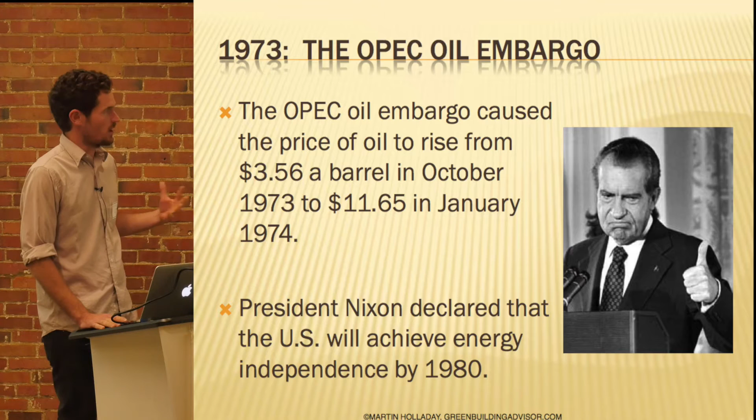So I'd love to give just a brief history of where this has all come from, and there's definitely a lot of people in this room that have been a part of that history and know it a lot better than I do. But yeah, this whole movement that has really culminated in Europe and is now moving towards our country really began here in North America. President Nixon claiming that we'd be energy independent by 1980 was definitely a milestone, and kind of got a lot of interest going in this country and North America in general.

This is basically one of the first Passive House prototypes from 1976. This guy's calling it the Lo-Cal House. But it's got a lot of the same principles that the Germans adopted to the international standard and what we're now using in this country. Good axis, super insulated walls, super insulated assemblies, really good windows, and mechanical ventilation. So all the same principles we'll take a look at.

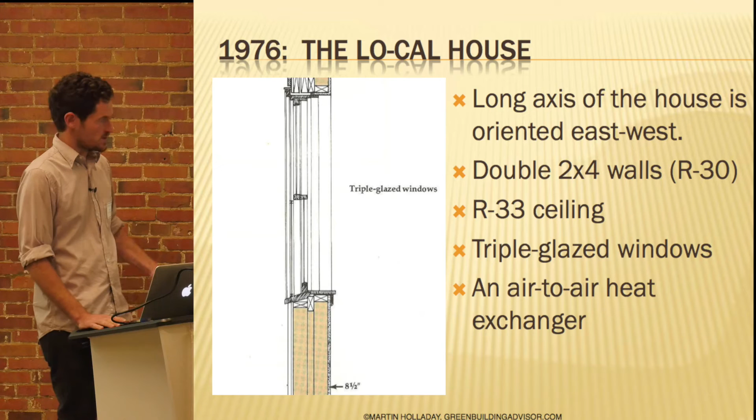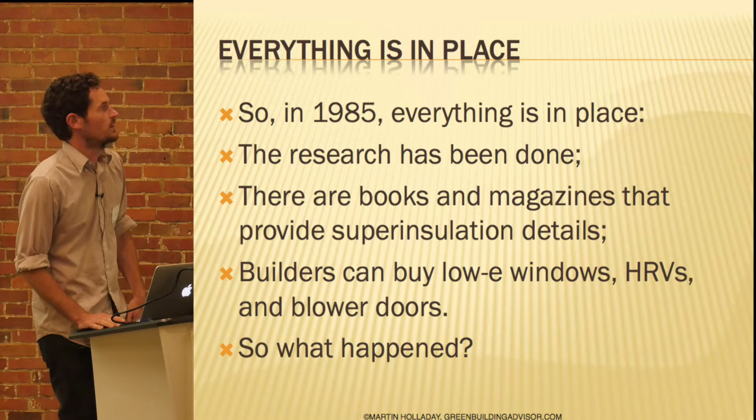1979, Jimmy Carter put solar panels on the roof of the White House. There's a lot of momentum. Builders know what they're doing. The magic boxes are starting to be created. A lot of the field testing has been done. Not to get too political, but this guy comes in, literally tears the solar panels off the White House, and we're kind of back at square one.

So fast forward a few years, and the Germans basically took what was going on in North America and built upon it, and they directly reference a lot of the experimentation that happened right here in the 70s and 80s, and basically refined it, and put their little German touch on it.

And so, just to go over the standard real quick for people who are less familiar with it, there's PHIUS, the U.S. governing body. There's 3 numbers to hit. It's climate specific, so that's the biggest difference, I think, between the two now. The international standard is one standard, whether you're in Iceland or Ireland. But either way, there's 3 numbers to hit. It's not a point system like LEED. You either get it or you don't. That's the basic piece of it.

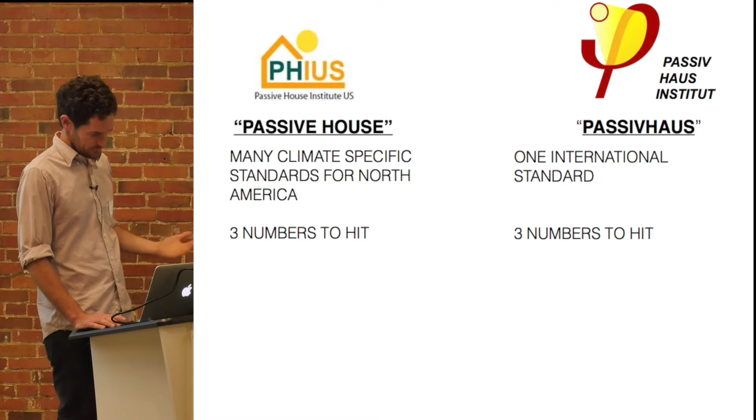This is the basic idea behind the Passive House movement: you're spending more money initially through increased airtightness, more insulation, fancy products, and eventually you break through this cost barrier. So your heating system drops down, and you have this amazingly performing house that's reasonably affordable, is the idea.

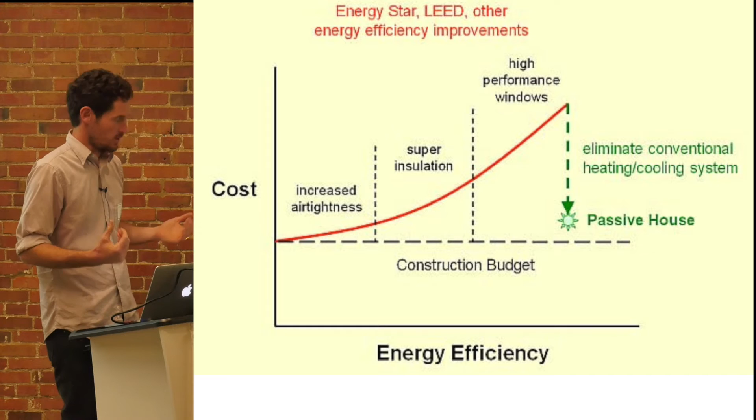The principles have shifted a little bit from when people were doing this in this country in the 70s and 80s. Obviously, solar orientation is still important. Super insulation, the windows, airtightness, I'd say, is one of the biggest things that the Germans have kind of tapped into, and also the balanced heat recovery ventilation system.

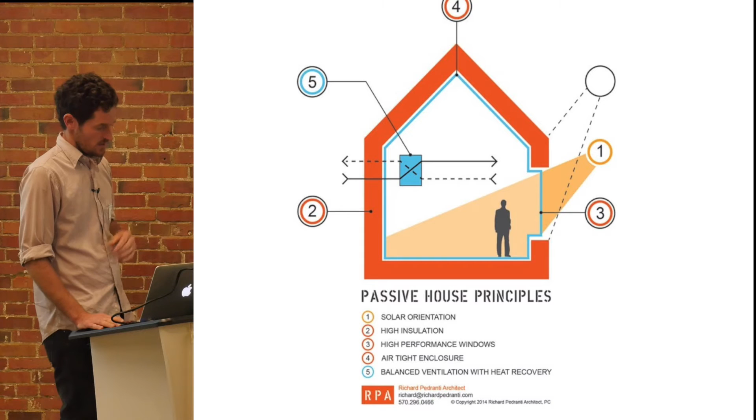When we run our energy models, this is how we like to see our homes generating all their heat, right? So a third of it from people doing stuff, a third of it from the sun, and a third of it from your equipment. So when we run models, we actually like to see that broken down like that.

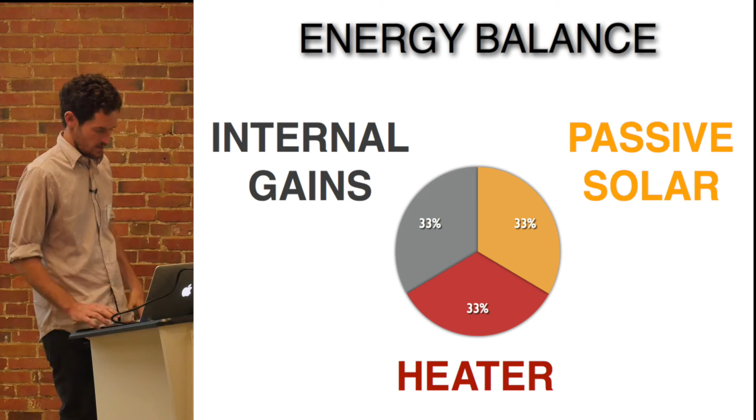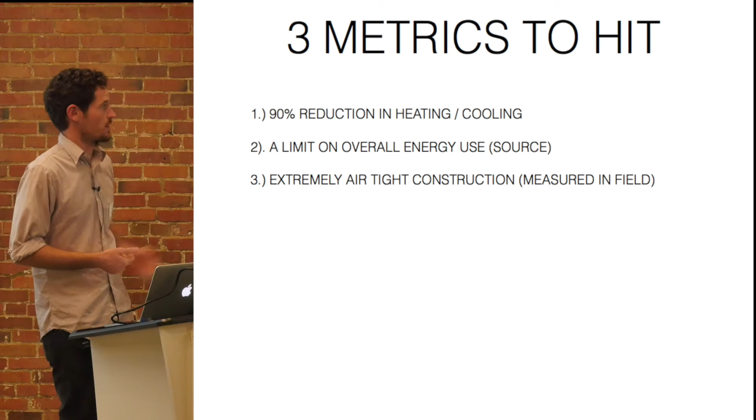So this kind of reflects the European standard, I would say, more than the new climate-specific US standards, but the idea is a 90% reduction in heating energy, and then a limit on overall energy use for everything, plug loads, equipment, HVAC equipment, all the pieces of the house, and then the extremely airtight construction, which is obviously measured in field, which I think is another reason why builders have really grasped onto this standard versus LEED and other things, is because it's very much dependent upon how they do their work and elevating their level of craft.

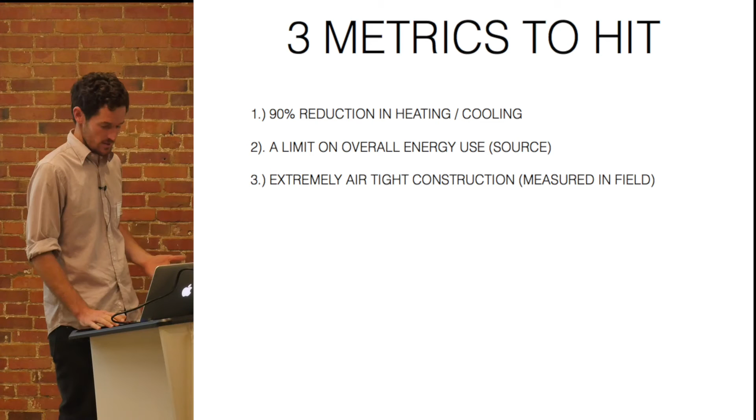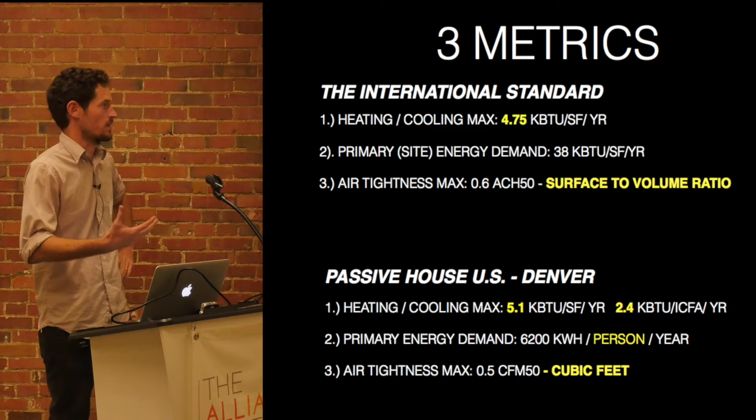So this gets a little technical, but I highlighted things, so I think it makes it a little bit better. So you can see the international standard hasn't budged. Their heating capacity is up there at the top, 4.75 kBTUs per square foot per year. If you look down at the US standard for Denver, we have a slightly higher threshold for heating, because it gets colder here than it does in Germany, where this standard originated. And our cooling is actually a lot lower because we have a really good climate that allows for thermal mass, diurnal temperature swing, all those type of things really help in that regard.

The primary energy, so the total energy the house can use, is also different. In Germany and Europe, they count it on a per square foot or per meter basis, where the new US standards are actually per person, which I think is actually really appropriate for our country, because we're not Europeans. We use way more energy than Europeans. So that's actually become a lot more lenient to reflect the fact that we're bigger, we're Americans, and so we need that difference.

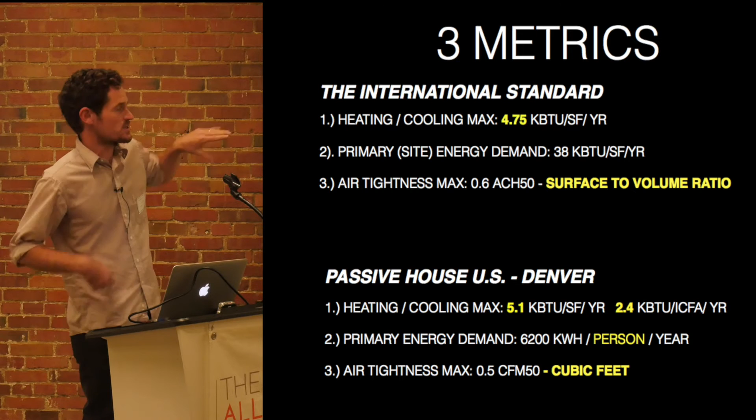The air tightness is also different. So in Europe, it's a surface to volume ratio, which basically encourages bigger buildings, right? So the bigger building you have, the more volume you have, and the less surface you have. So in Europe, they're like, okay, if we encourage big buildings, then there'll be more townhomes and less single family homes. Really smart. It kind of had the reverse effect here, because we build single family homes, and you actually get dinged on smaller homes based on this air tightness measurement. So that's another thing that the US has addressed, it's more on cubic feet. So you don't get penalized for that smaller house now, which again is appropriate for us because we kind of messed that part up.

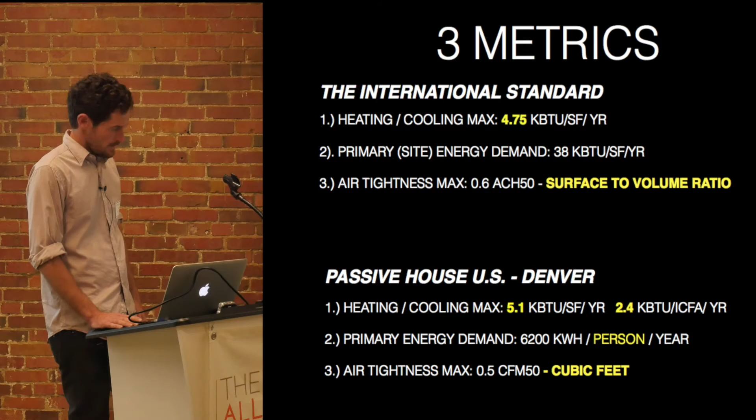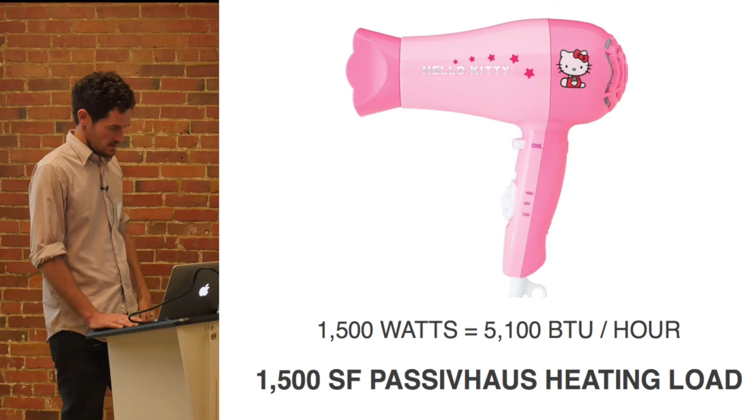This is the idea, right? So technically speaking, you can heat your house with a hairdryer if it's a Passive House certified project. You build a bigger house, you still need slightly more heat in there, but again, these loads are tiny. Your heating system is tiny.

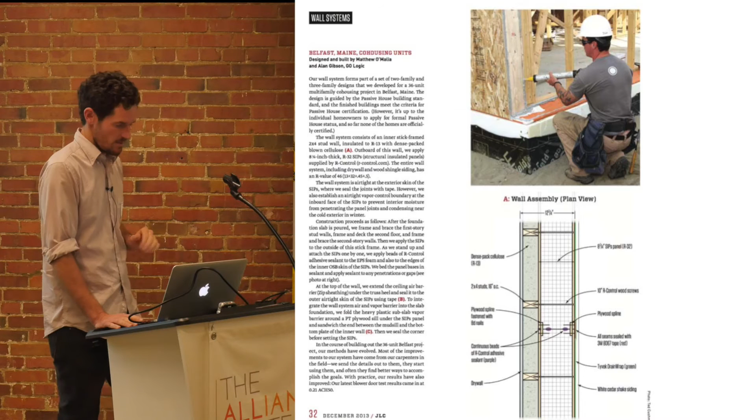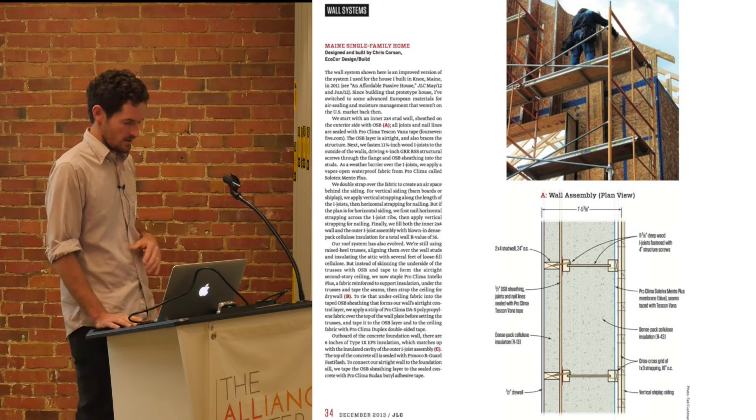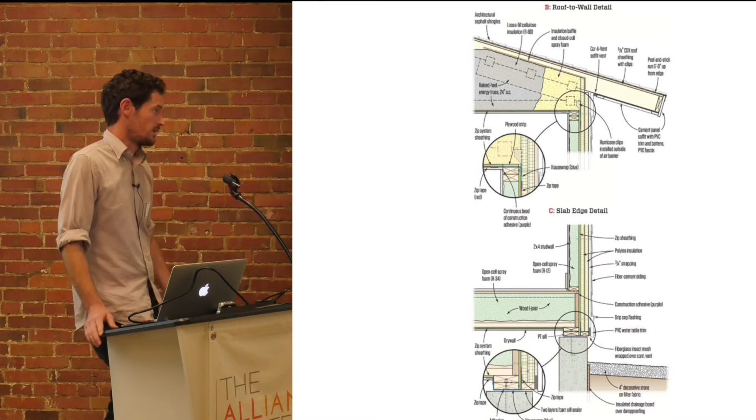This is the double stud wall, which is very common in New England for doing passive houses. Totally thermal bridge free. You can see that whole cavity is just filled with insulation. And there's people in Alaska building these things where I've seen photos of builders where their kids are running through the walls because they're so big, and the whole thing is filled with cellulose. So this also is builder friendly, I think, because you're basically framing the house twice. There's some thermal bridge issues with this system, which we'll talk about.

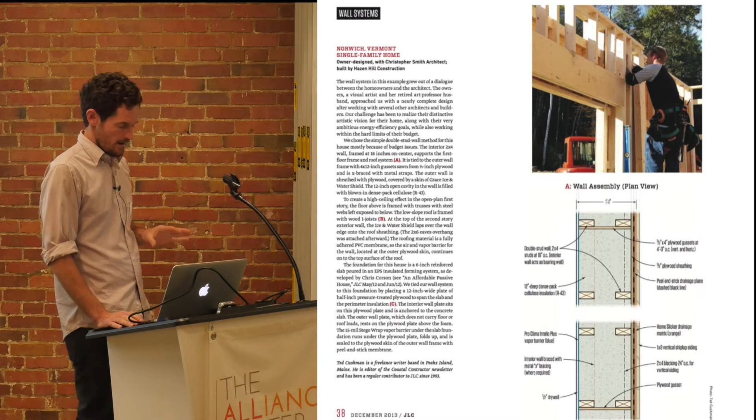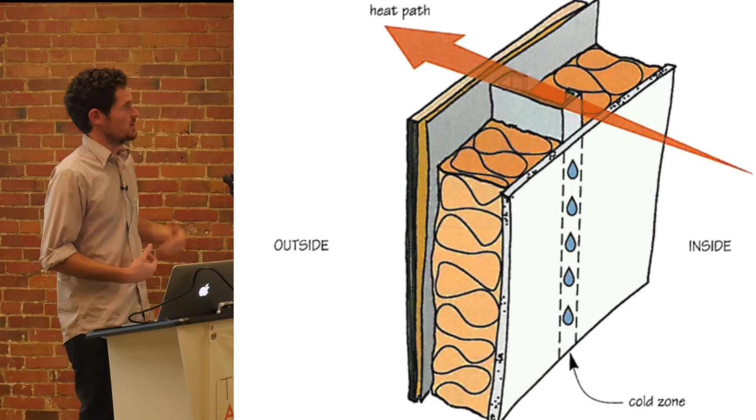So this is another obviously huge principle of the passive house, the thermal bridge, right? I know most of you have probably heard that term or even know what it is or have seen it, but the basic idea is when you have things going from inside to out, not only are you wicking that outdoor temperature in at an incredible rate, especially with steel, but you are also encouraging mold and other issues within the building assembly.

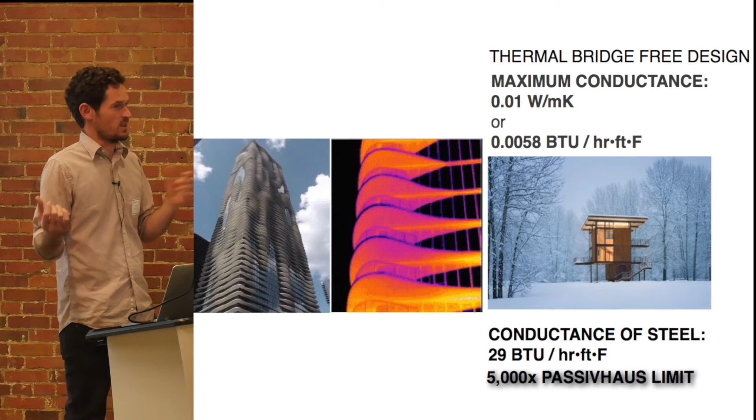So Passive House has a threshold of a thermal bridge, what thermal bridge free means, which is a tiny number, 0.0058 BTUs. What does that mean? The conductance of steel is at 29 BTUs, which is 5,000 times the Passive House limit. So there's no level of insulation. As soon as you put a steel beam on your house going from inside to out, you're never going to recover from that. So that's a huge piece of these design tools that they monitor and help you with.

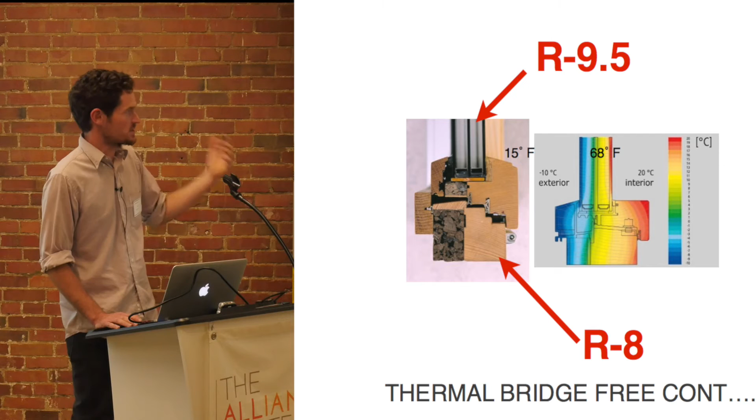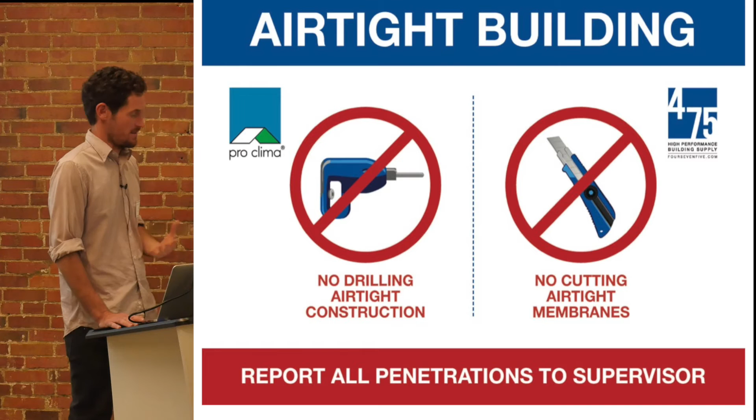Airtightness is obviously another huge piece of this. That's another thing that happens on site that is very hard to monitor and very frustrating at times, because typically you're working with subcontractors that don't care about your passive house vision, and are in there and make a mess and get out of there. So this is actually a sign that this company provides to plaster all over your job site, which who knows if that helps. But this is a product from Europe, zero VOC, made in a zero VOC plant. It acts as a vapor barrier and an air barrier. It's becoming a lot more common in this country.

This is obviously on the inside of a cathedral ceiling, and then you see that strapping there for a cavity to run electrical lines. So pretty smart system, pretty amazing product. What are we looking at? I'm not sure. Oh, sorry. You're basically in an attic and you're seeing the underside of a... Yes, but what's the material you're talking about? Oh, well, there's a couple different ones. This one's called Intello. Siga makes various air vapor membranes as well. So it's a membrane and an air barrier.

So yeah, it's different than the old vapor barriers that we stuck in our walls in this country that trapped moisture. These products are pretty amazing in that they're not allowing any air infiltration into the assembly, but also allowing it to breathe when moisture gets in there. So pretty cool stuff. Reasonably priced. Then come the blower door tests, and the builders get to geek out. They get to walk around with these cool smoke pencils and sniff out the problems in their assemblies, because the levels of airtightness these projects are going for require this level of detail, and it's definitely a learning curve for everybody.

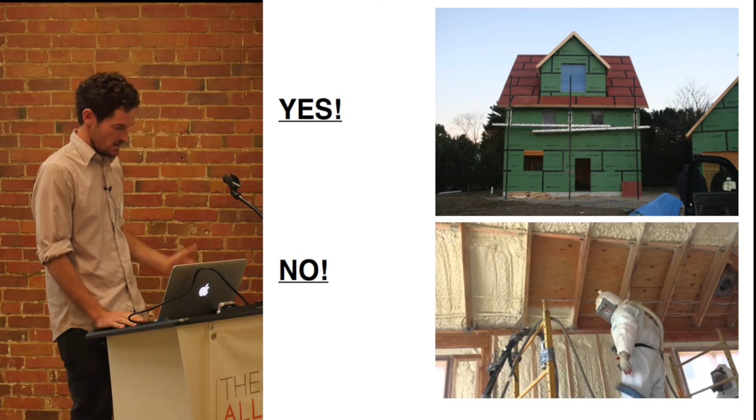A huge piece of this passive house puzzle is the mechanical ventilation, which is shocking that there's so little of this in this country, where it's very standard in most parts of Europe. It basically acts like a bunch of straws, continuously drawing fresh air in from outside and pre-warming it with the stale air that's inside the house.

So these things are like 80 to 90% efficient. If it's 0 degrees outside, 70 degrees inside, all of a sudden you have fresh conditioned air coming in at 55, 60 degrees. Pretty amazing. Obviously it's a lot easier to heat up that air from that level than taking it all the way from 0. We just rely on crappy construction for fresh air in our houses, at least in my house.

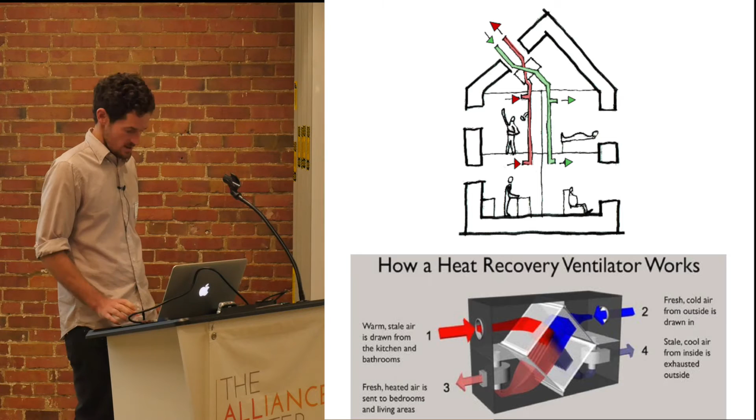So yeah, we've installed some of these, and I'll show you some in some projects.

But then, of course, there's the total source energy. That's another piece. There's the European standard based on a square foot. This one's really hard to hit for single family, for multifamily, for a lot of different reasons. It's hard to model. You've probably heard the expression, there's no net zero buildings, only net zero people. So a lot of this is like a question mark, about what equipment people use, how often they use it, that sort of thing. So easy to type into an energy model, hard to get people to follow that.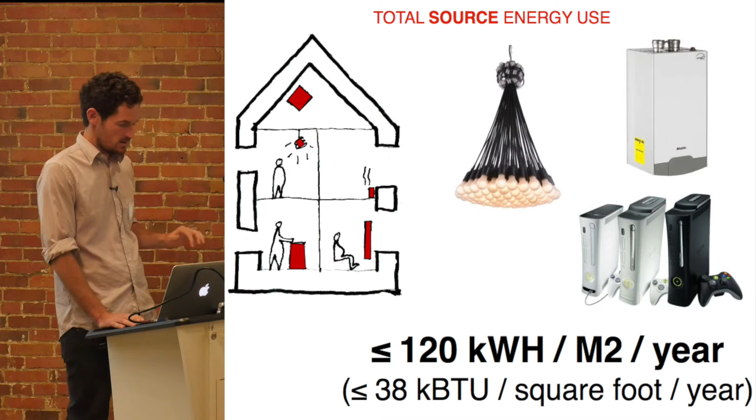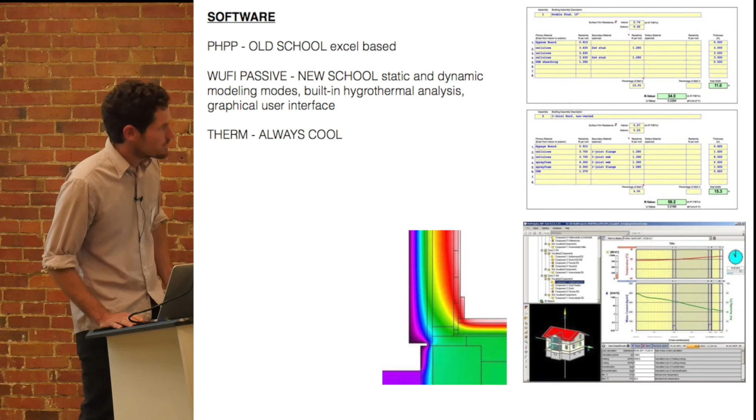So I'll just go through a couple of precedents. This is a single family home that I worked on as part of the design team and certified. This is a dashboard that we built on the front of the Passive House spreadsheet model, and it's basically a tool for clients that we've used. If anyone ever wants this spreadsheet, this dashboard, I'll be happy to share it.

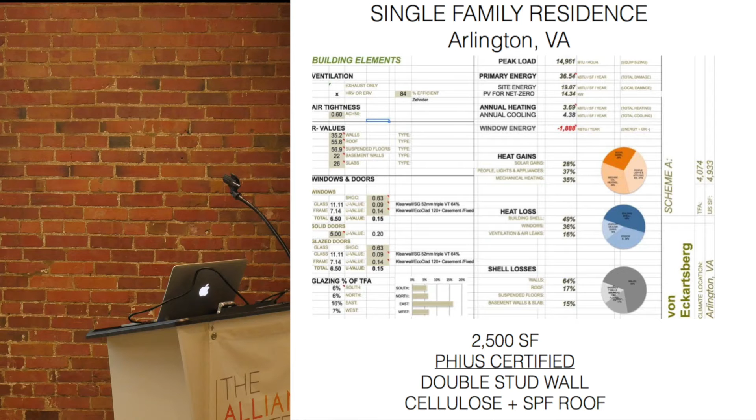It's really helpful because it's like a 30-page spreadsheet, but it all kind of comes to this front, and you can quickly dive in and change the different R values and all the different assemblies. You can see that 33, 33, 33 heat gain model that I was talking about.

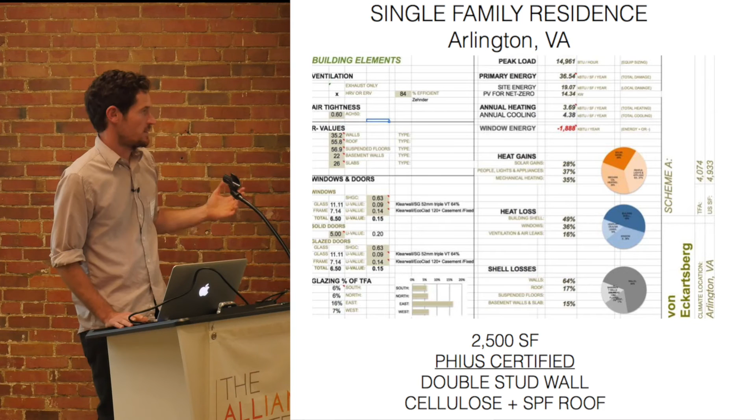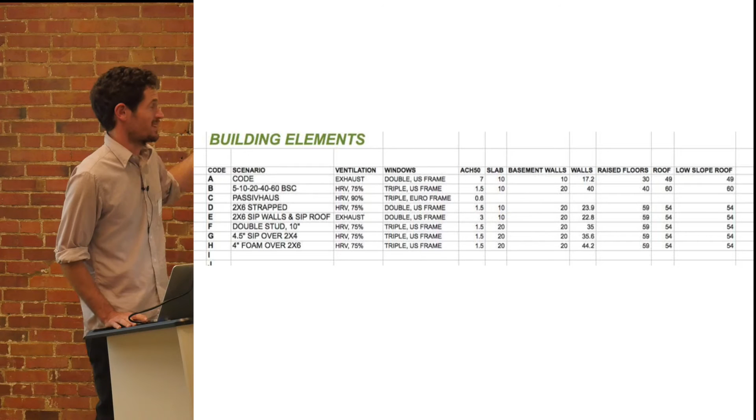So this is a double stud wall project in Virginia, based on the European standard before PHIUS brought out the climate specific standard. Typically what we do with clients, we try to figure out various ways of getting to the Passive House standard, various assemblies, different ways of going about it. We try to find the cheapest way.

We also run energy scenarios based on different fuel options. In Maine, where I worked for 5 years, there's a lot different fuel options than there are out here. So we end up running a number of scenarios.

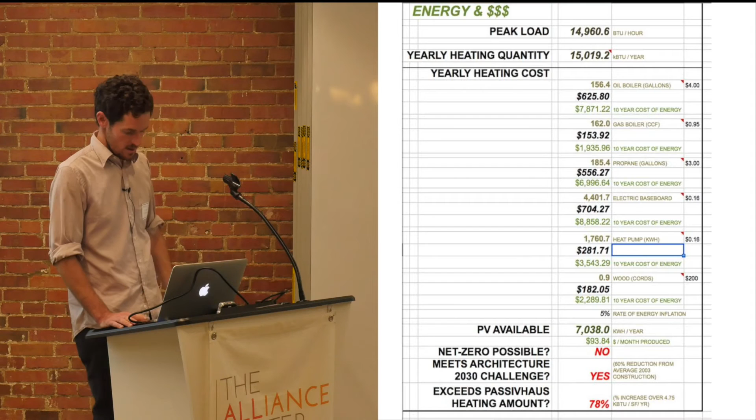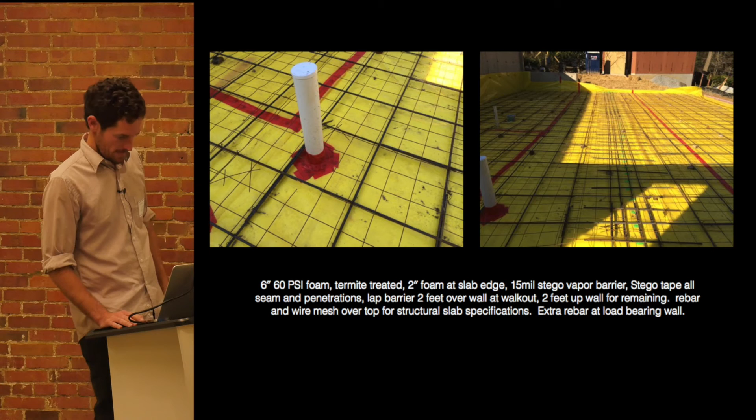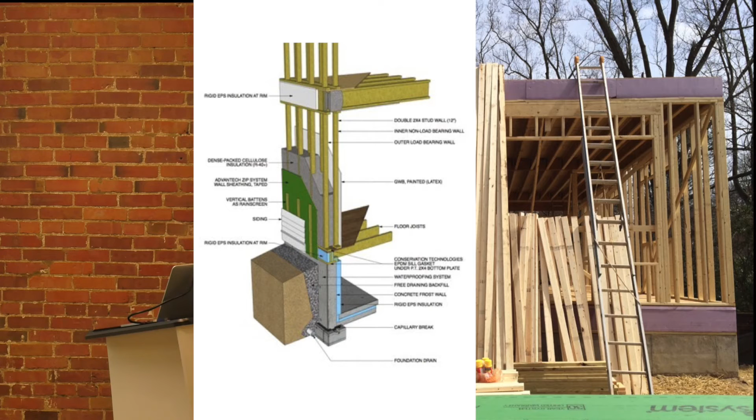So again, like I said, this is the double stud wall, which is a good system. However, as soon as you get up to the rim area, as soon as you start stacking floors, you end up with these kind of awkward areas where there could be a thermal bridge. So you start introducing foam, and it's not ideal. You definitely start cantilevering, framing out a little bit. It gets a little messy that way, but again, still a solid wall assembly.

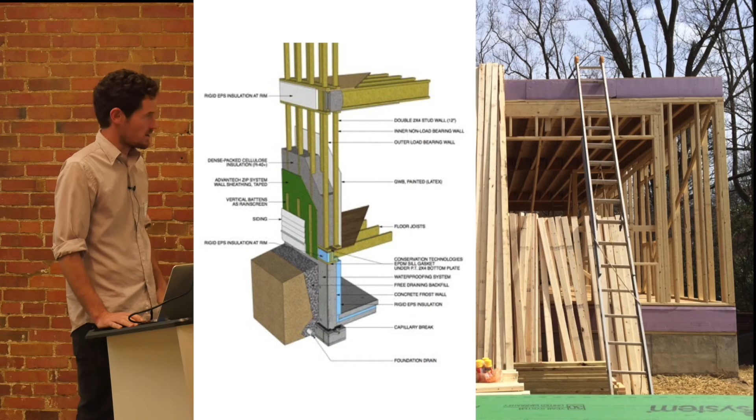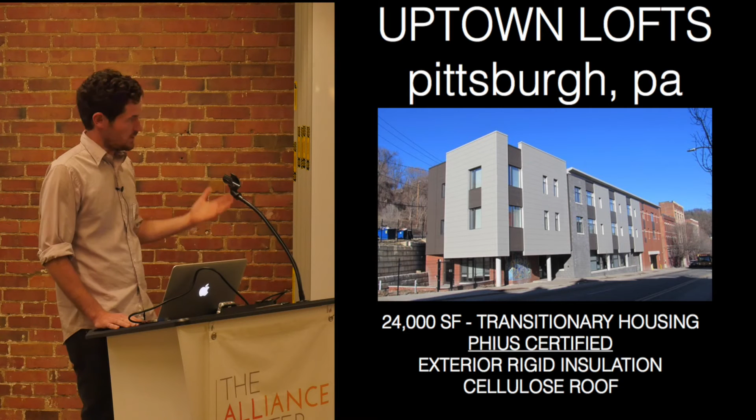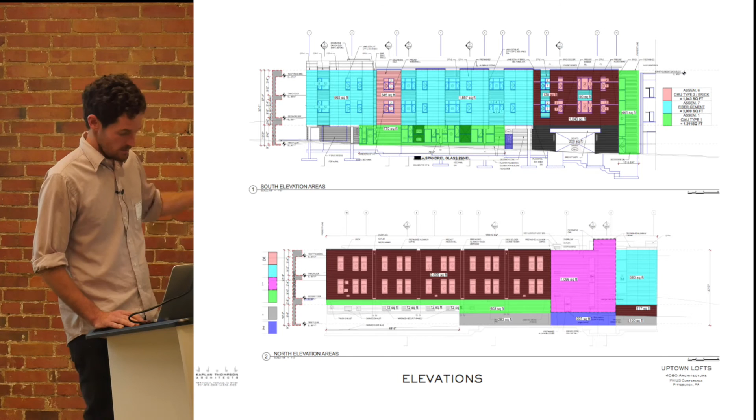It's a 24,000 square foot transitionary housing in Pittsburgh. I think these are the types of projects that the standard was meant for, that we should be seeing in Denver very soon, hopefully. This is an exterior rigid building, that same thing that we looked at before. I was just the consultant and certifier on this, so I can't answer any design questions, but a number of different wall assemblies that all have to be modeled differently. Pretty simple, straightforward building.

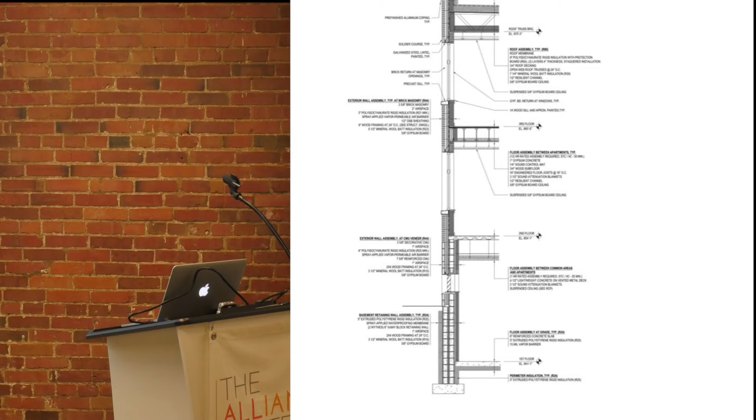Just like I said, the rigid foam on the outside of a wood-framed wall. You can see actually down at this footing, there's a big old thermal bridge there, right? That concrete footing is just sitting in the dirt.

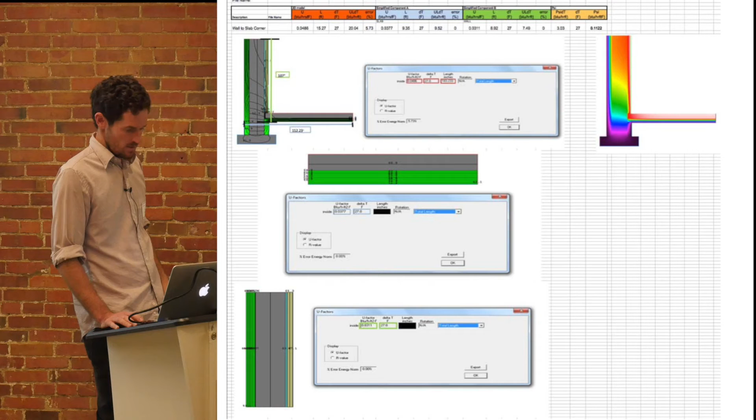So we had to run some THERM calculations on that, which, based on the size of the building, actually wasn't a huge impact, and it was below their threshold, but it barely skirted through. Typically something like that would be more of a red flag, but because of the size of the building, the fact that it was multifamily, it worked.

Again, this is part of the energy analysis for internal gains and equipment, and it's totally insane—you're guessing at it. We had to put some of the lights on occupancy sensors that would go off every 1 minute just to hit the standard.

Again, this was done under PHIUS before they had the climate-specific standard, which I think is part of the problem—we were barely getting the overall energy use, and I'm sure that building is actually using more energy. But a lot of thought went into how to reduce those internal loads and the lighting and all that stuff. So it might not be hitting it, but I'm confident that it's close.

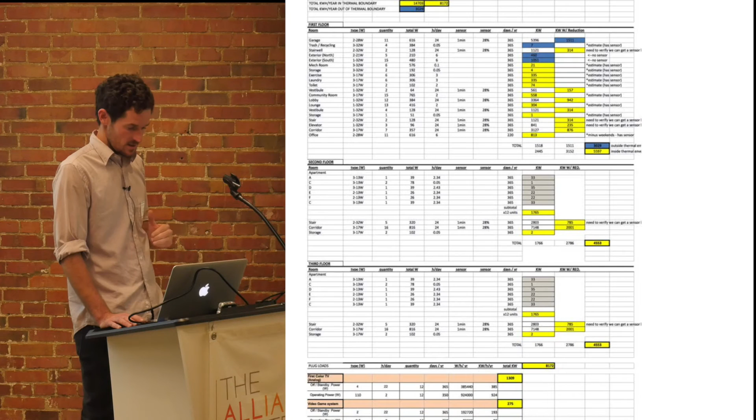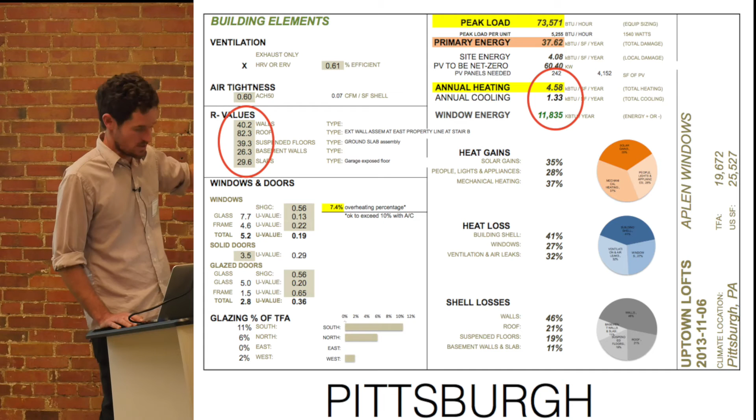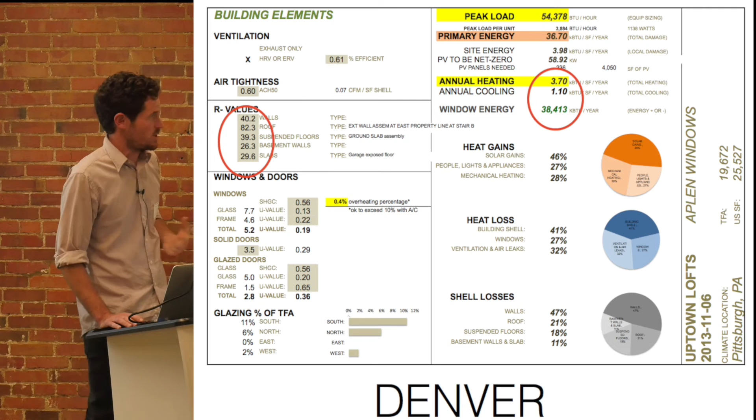I basically switched over to Denver climate data to see what that project would look like if we'd built it in Denver. Obviously the heating goes way down, right? So we're still at the same assemblies, but all of a sudden we can really dial back some of those insulation values.

If you start talking about the PHIUS climate-specific standard, all of a sudden we're going up to 5 instead of 4.75. So I basically just typed in this R25 wall. We're still hitting the standard, and that's right in line with the next code rendition that Denver is adopting. So what am I trying to say with that?

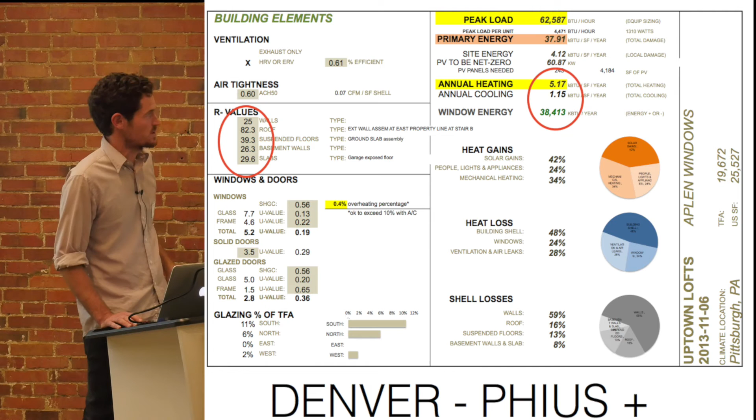It's not that hard to hit this standard, especially with this building typology. But there's a lot of other parts that go into this in terms of air sealing, good components, a heat recovery ventilator, good windows. But it's not insane—we're not talking about R50 walls.

This is a school that I designed and certified in Maine. It's a PHI project, so it went through the European governing body. It's another exterior rigid insulation building.

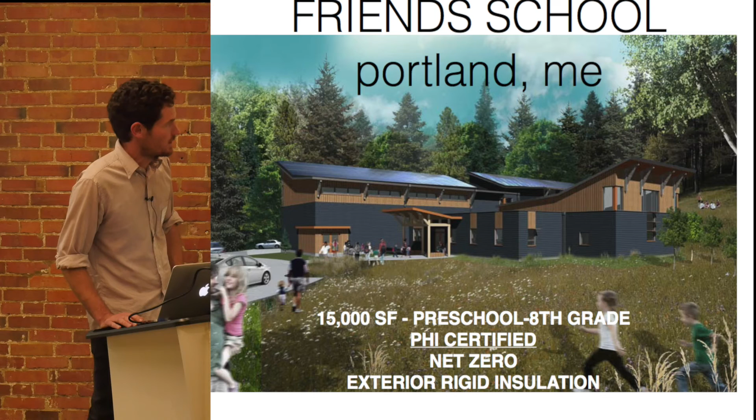One of the first things we do, we like to make really dumb models in SketchUp and make sure we're figuring all the sides of the building and calculating those areas. That's a big part of this.

Another big part is obviously shading. So this is our site—you can see to the south are these massive trees. Obviously the school doesn't want to start mowing down trees everywhere. So that was a really contentious issue in trying to get certified, but being very careful about how many trees we actually removed from the site.

This is a Solar Pathfinder—a fantastic tool. It's been around a long time, but basically what it does is show the various months of the year, starting down below with August, April, September, March, and up here January, February, December. As you go up into the cold part of the year, all the solar radiation is happening in the middle part of the day.

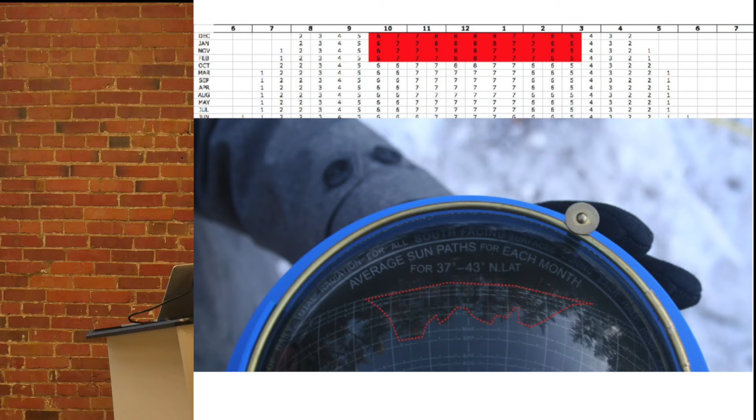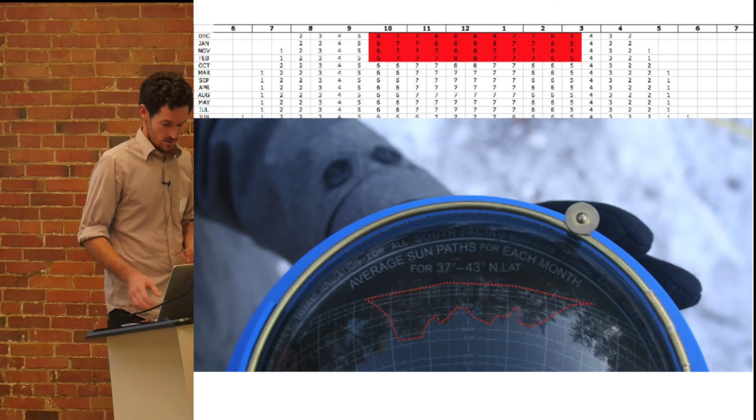So using this tool, I don't even know how old it is, we could literally pinpoint trees and just remove a handful of them to make sure we were hitting our radiation points for the middle of the winter. Super cool tool, very dumb and basic, but very, very good to use.

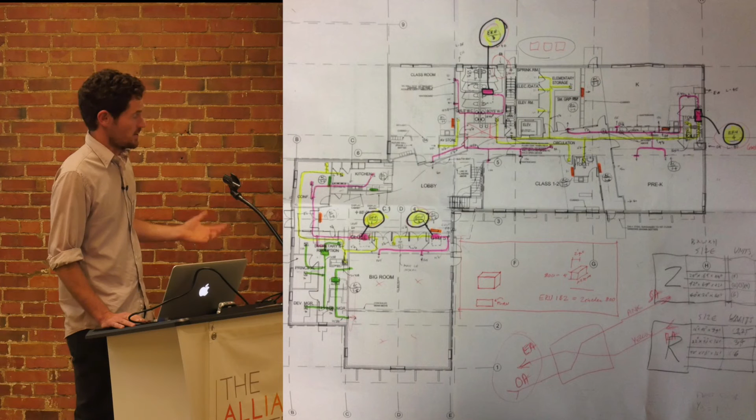The mechanical layout—obviously as an architect you get way more involved with that, just finding space for all these new components. It's definitely a stretch and something that has to be considered early. Looking at different types and brands is super important.

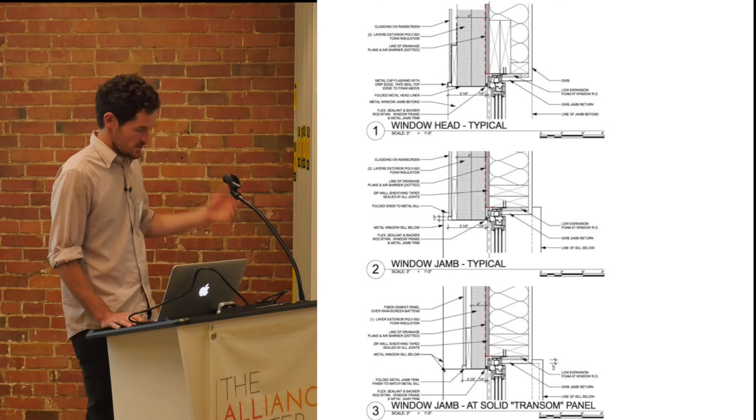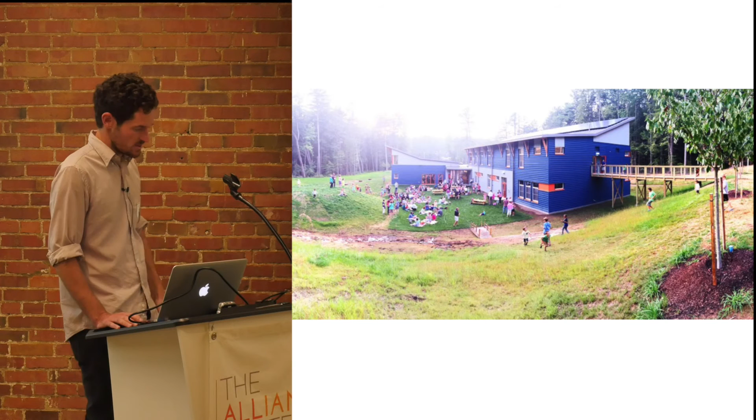This is just kind of an idea of what the building envelope looks like—pretty straightforward assembly: triple glazed windows, 4 inches of polyiso, brand new polyiso on the outside. So definitely a big carbon footprint on that one, but that was the most cost-effective way of achieving certification with this project.

This is a 45-unit building in Portland, Maine, pre-certified through PHIUS. It's basically almost built now. It's modular construction.

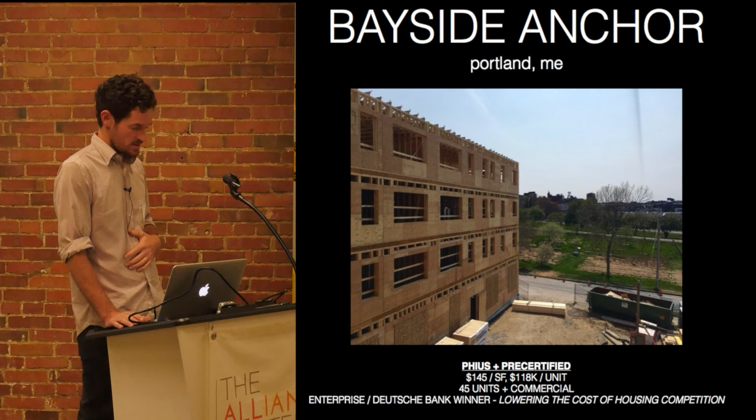Basic idea of the floor plan: commercial downstairs, single bedroom and 2 bedrooms on the upper floors.

This is the outside. It's being covered in a liquid applied air barrier, which I think is way more common on these bigger buildings. It becomes way more cost effective. So instead of that sheathing I showed you guys with the taped seams and everything else, this all of a sudden becomes very cost effective with this scale of building.

You can see all the windows have been taped in, and even on the other side, you can see that first round of air sealing that happened where all the seams were and all the nail holes. That's round 1. Round 2, you get the full coating on this building, so extremely airtight. Here you can just get an idea of the windows, and again, that double stud wall going on each box.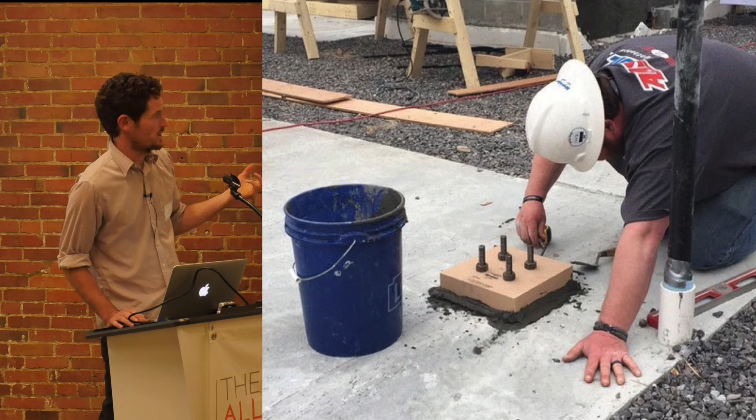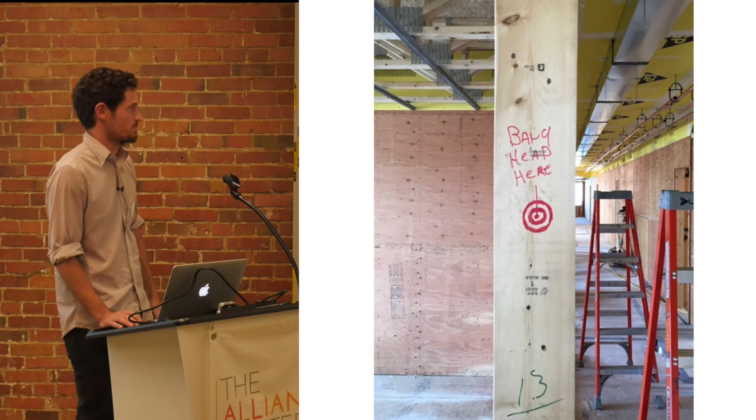There's obviously some details that need to be thought about. This is like a thermal isolator for a structural column. These are the types of things that make or break certification, so extremely important to think about. I'm sure this guy's not too happy about that, but again, just a huge learning curve from the subs on this project. A lot of them weren't very happy with it. But these projects have to happen because they get so much easier the next time.

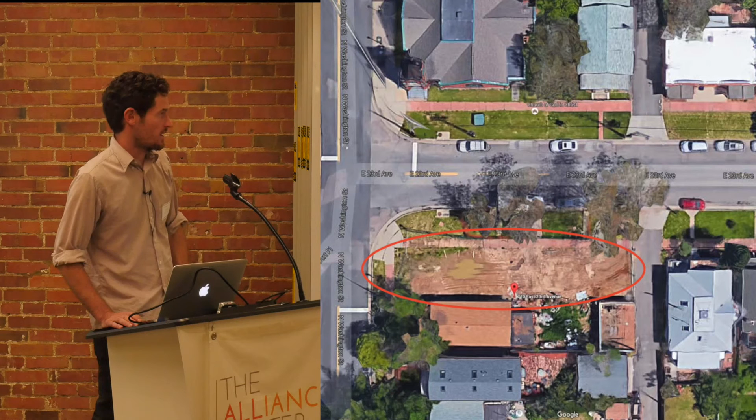This is just a recent project my company did. It's not certified, nor is it that close to being certified. A lot of it is because of our site. If we were in the southern hemisphere, this would be the dream site. You have big deciduous trees to the north and a building directly to the south about 3 feet away. So very early on, we determined it wasn't a great candidate for certification, but at the same time, we wanted to adopt a lot of the principles in the standard.

This is the existing house. It was actually a crack house with some scary stuff inside. But you can see they had some passive solar going on in the original structure.

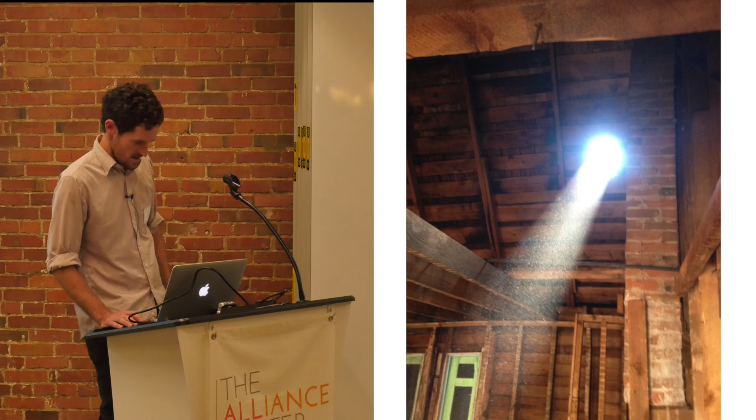This is the basement. There's all this reclaimed rigid foam that we were able to find. There's this great place outside of Denver called Reclaimed Materials, and they just get truckloads of this foam that they pull out of old Walmarts. It's kind of a pain in the ass to get, but you're basically creating a global warming potential of 0, because somebody already made the bad decision to make this stuff. Definitely recommend that place. So a lot of this is reclaimed.

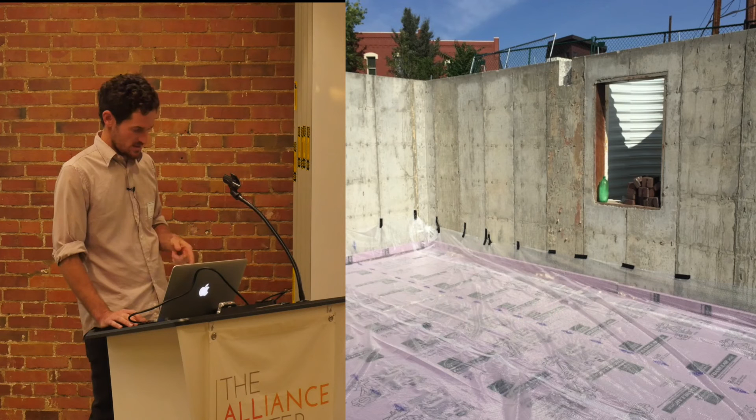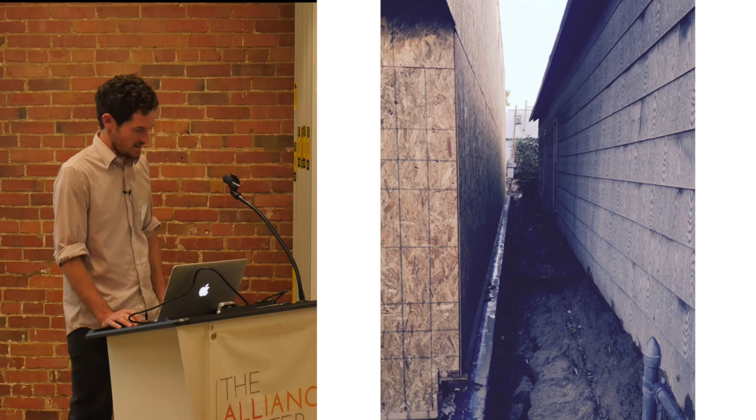This is the vapor barrier going on underneath. This is just an interior shot of the frame wall, but you can see the cathedral ceiling, and all those bays get filled up with cellulose. This is the south side I was talking about. Obviously, only a few opportunities here to do any sort of passive solar. Again, there's the outside rigid insulation, so a lot of that was reclaimed as well.

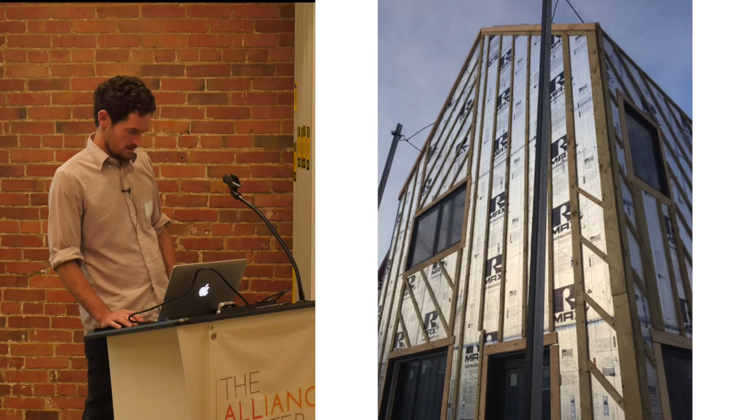This is the basement, so we have 4 inches of EPS foam on the outside of the foundation wall. We kind of left the interior pretty raw, and the slab is just exposed with some stain on it.

The ventilation system also helps move that warmer or cooler air around the house. What size mini splits? Each floor needed less on the top. Can you throw numbers? I think they were 9,000 BTUs. Each? So you didn't stagger them? No, we didn't stagger them. Top of 12 and bottom of 9, in the middle because you needed more? They're all basically the same because we figured that there would be good circulation with the mechanical ventilation.

There's also backup heaters in the bedrooms upstairs that are strategically located basically right above the ventilation grates. So as soon as that air comes out into the room, fresh, constant air, you can just kick up these little heaters in the middle of the winter. Because again, people close their doors with bedrooms, right? Down here in this open space, it's gonna have no problem circulating.

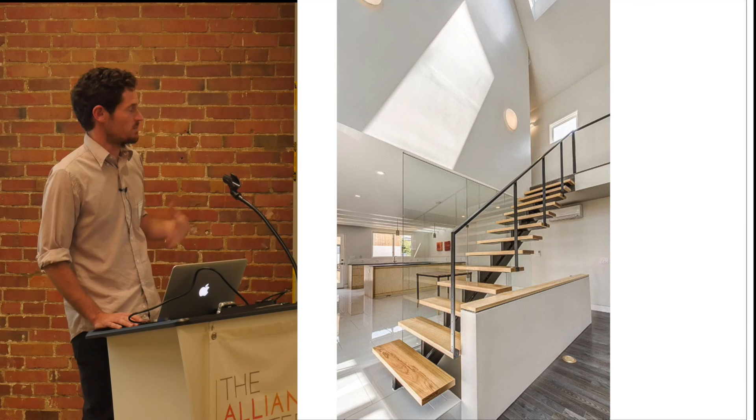We did actually get a couple south-facing clerestories off to the right-hand side. You can see these little cuts that we tried to make in the building. There's also south-facing skylights, which is kind of a crazy move in Colorado. But again, we have so little fenestration on the south side and it's only in this double height space. So our thought was that it wouldn't be cooking in someone's bedroom necessarily. It'll dissipate through the house.

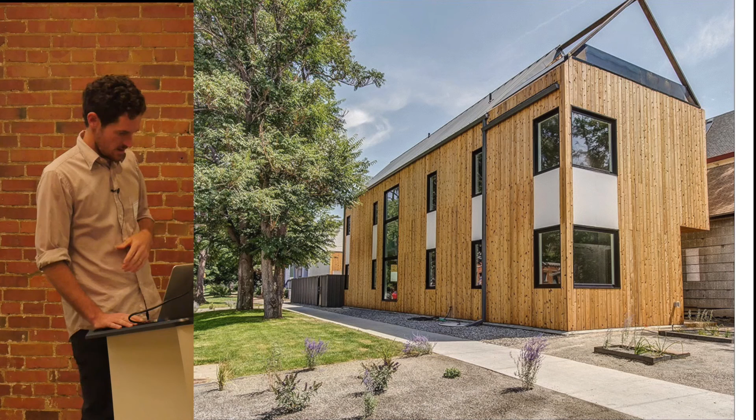In this picture, you can kind of see this big beam up in the top portion of the slide. We try to incorporate these details where we're bringing a lot of the structural members inside the insulation blanket. So as opposed to bumping that up into the roof framing and creating one big thermal bridge, you drop it underneath and you get a nice continuous blanket above that. So that's the outside. That's the cool deck.

Certification, I think that's extremely important, whether it's through the US or the European body. I've seen these projects take off in New York and New England, and it doesn't take much. It's usually just a couple certified projects, and then there's a lot of interest around this stuff. So I really hope to see a couple more certified projects in this area. And I think it's bound to happen. I just hope it happens sooner rather than later.

With the international, I've found that I've handed it off to them a lot quicker because it's metric and confusing and there's language barriers. But there's also a great level of detail and care taken. This is just a back and forth with the US body that I've done for various projects. They have some of the best building scientists in the country working for them. So again, saying that someone will build you a passive house is very different than having PHIUS or PHI actually certify your project, because they really dial down on all these things that, if you hire a designer or a builder, they're not going to cross all the T's and dot the I's.

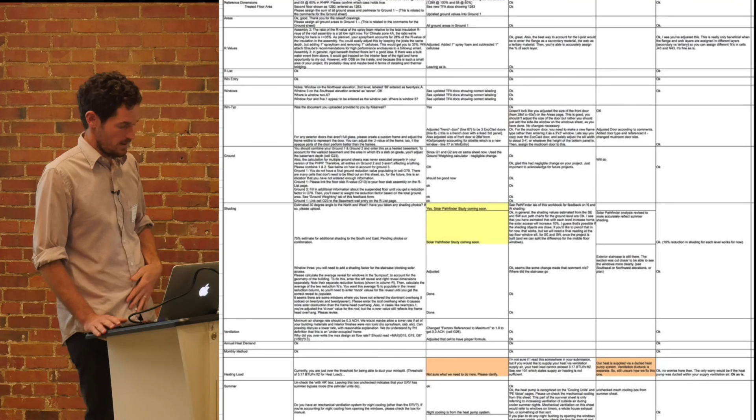Who was they? Sorry, this is the US body, PHIUS. That's their way of tracking all these changes in a project, but like I said, it's a little bit more hands-on with them. Which can be good and bad.

Question. You say certified, and you said it's very important. Okay, there's a value judgment. I want to understand why the certification is very important. To the homeowner, or to climate, or to flooded-out Bangladeshis? The whole spectrum. I think it's extremely important for the client because there's so many people out there doing eco, green, passive solar crap that if it's not certified, it's not guaranteed to a certain level of thermal comfort, good air quality, lower energy use, resiliency over time. So I think there's plenty of incentives for the owner.

For us, it's kind of the same argument for the Bangladeshis: if these buildings actually aren't achieving those metrics that we set out to do, what's the point, right? Maybe they perform better, but it's hard to quantify. So you have an assumption, when you say for the owner, that the owner is not an informed person that can judge what's good. No, I'm not saying that they're not informed. I'm just saying that without it actually becoming certified, things can get missed, and it's that third party level of qualification that's the only guarantee, I think. How much does it typically cost to get a house certified? That's a good question.

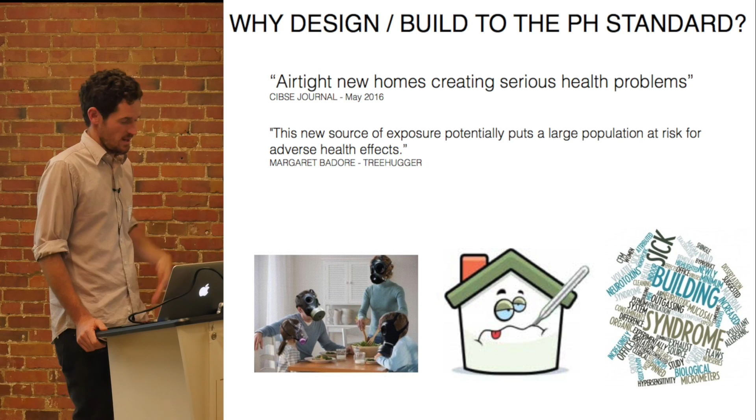They're different, but I just say that because that's the umbrella term. It's the one that's more common that you hear of. But yes, the energy recovery ventilator is different, and it's totally dependent on occupancy and the size of the project. So yeah, we've used both, but I say HRV because otherwise, if I start throwing both of them in there, then it's confusing. But yeah, that's a good point. So it really depends on the project.

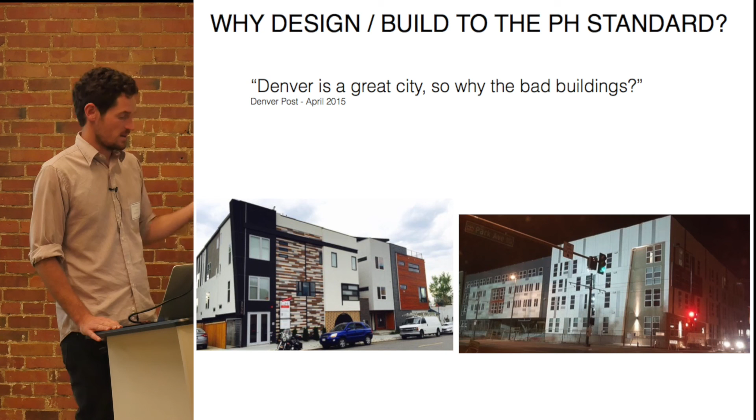I think there's a piece of this design, the rigorousness of the Passive House design, that just puts more emphasis on the built environment. And you can see that across Europe with the adoption of not only that standard, but also the craft and care that goes into their building envelopes and their architecture. And I think this standard would go a long way to addressing some of our more recent issues in this city.

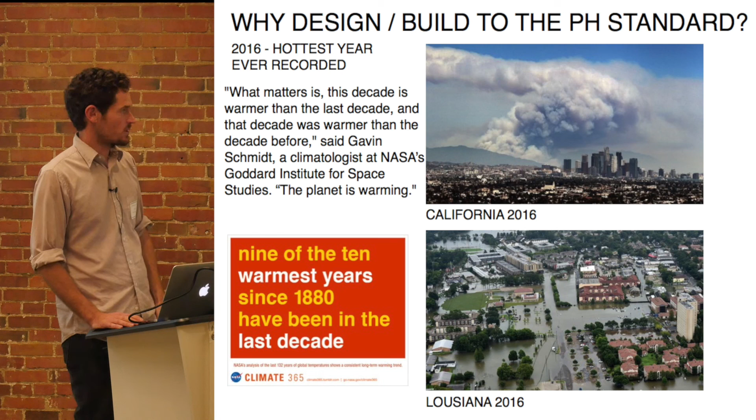We kind of talked about this with the Bangladeshis, but even in this country, you guys know all this stuff, so I'm not going to dwell on it, but this is obviously a big part of why I'm interested in it and why I want to see more projects in this area, because this climate is perfect for it, and there's no reason that we should not be doing it.